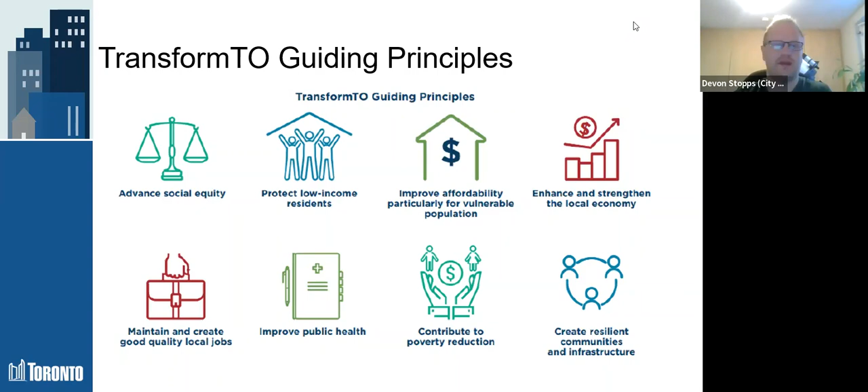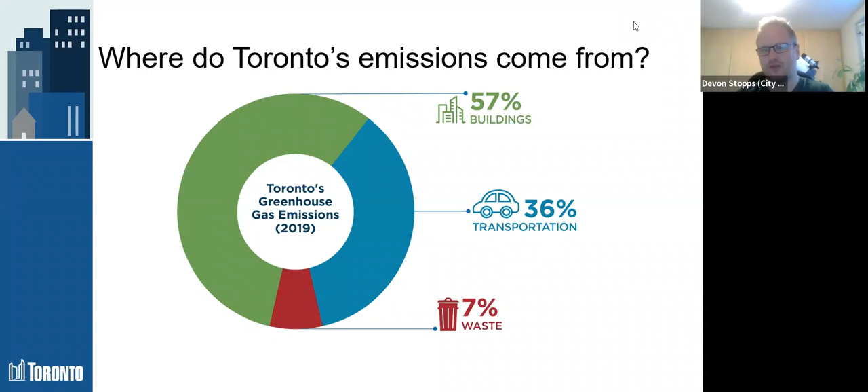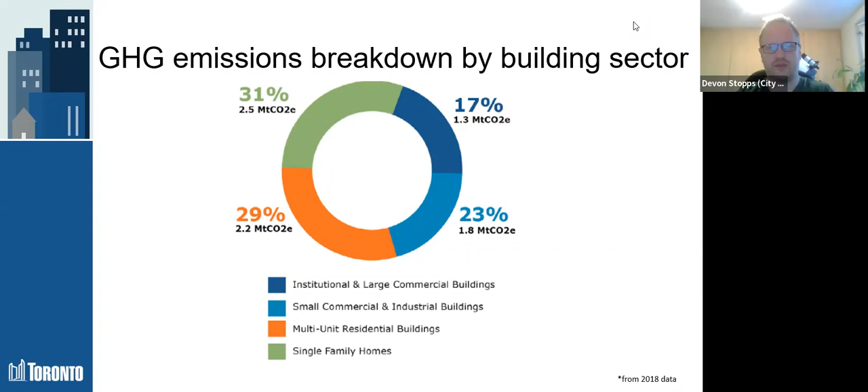So where did Toronto's emissions come from? In our latest greenhouse gas emissions inventory, we see that buildings actually make up 57% of Toronto's emissions, with the remainder from transportation and waste. Out of buildings, it's even more interesting to break down where this comes from in those sectors. I always like to use this slide to point to single family homes at 31% and multi-unit residential buildings at 29%. This is something everybody who lives in the city can touch, because over half of those emissions are from buildings that we live in.

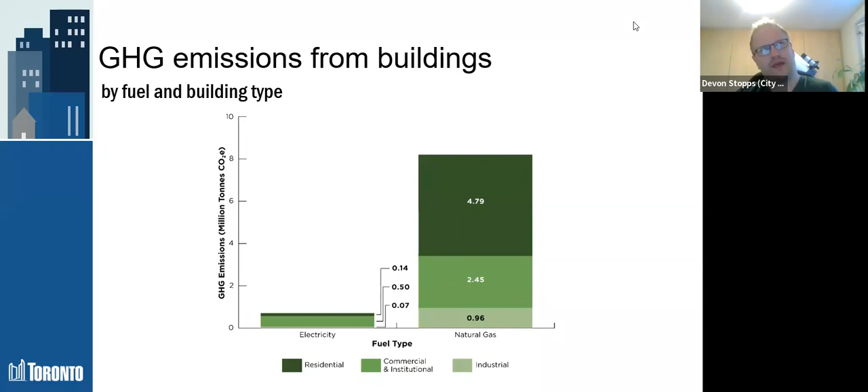And inside of those buildings, it's broken down even further by fuel type. Most of those emissions, as you can see on the right, are from burning natural gas, and that's almost always in residential and commercial buildings focused on space heating and water heating. We have cold winters, and we like to take hot showers. So that's something where there's an opportunity to do better.

So I'll hand it over to David to talk about new buildings before coming back to existing buildings after.

Thanks, Devon. Just to note, there was a question that popped up in the chat about what something stood for. I don't know if you saw it. I see that now. So MTCO2E is megatons of CO2 equivalent. We can dig into that deeper if you want, but just let me know. Send another question if you want to go deeper.

Oh yes, please. Okay, so CO2 is what we'd call one of the greenhouse gases, right? CO2 helps hold heat in the atmosphere. Now when you're looking at gases in the atmosphere, it's not just CO2 that helps hold heat in and causes this greenhouse effect. The other big one that's talked about currently is methane, and some of those fugitive methane emissions, because methane actually has a much higher global warming potential than CO2. So it's equivalent to much more than one unit of CO2. Same as other things like refrigerants in your air conditioner - they also have a global warming potential, and they'd have an equivalent value of CO2. So really, we just use this measure to make sure you're measuring in the same way across the board.

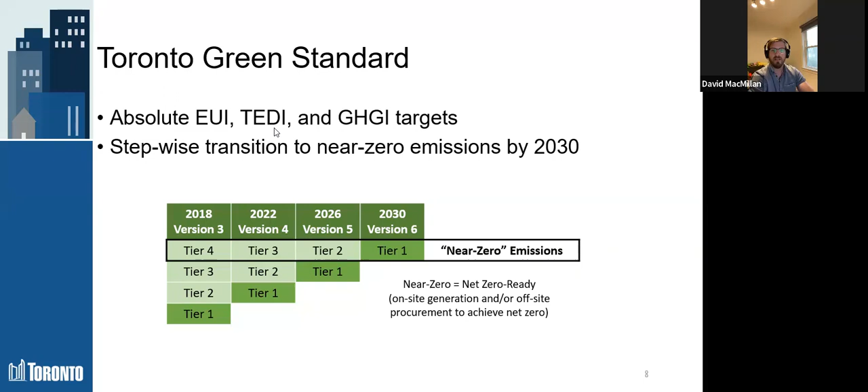But then it was accelerated just at the end of last year, as I said, when council adopted the net zero strategy. So basically our GHGI targets now in 2025, so it's been accelerated by 1 year for the next version of the TGS, version 5. And then the final version of the TGS, which is essentially net zero emissions, is now 2 years earlier. So in 2028, as I said. So we really have less than 6 years to get to buildings that are fully electrified and use some renewable energy on site.

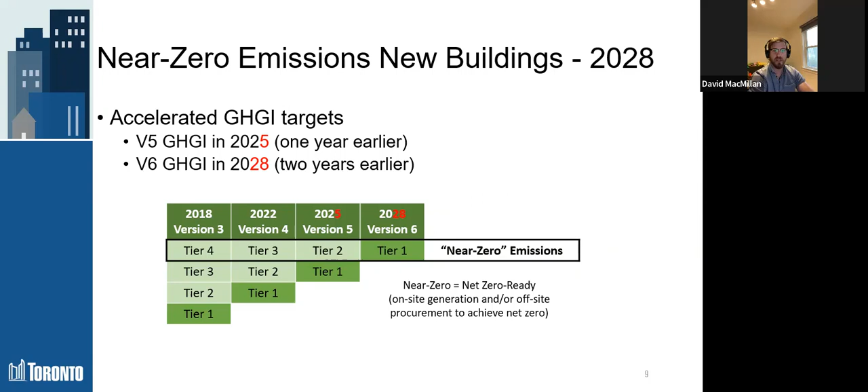Next slide. And it gets even harder for city buildings, which is what we're really talking about today, city-owned facilities like the St. Lawrence Centre. Since basically the start of this year, council said city buildings have to be net zero now. And it's important, and I can appreciate there's some nuance with these terms, but net zero is different from near zero. So city facilities have to actually achieve a GHGI of 0.

So if you're a private sector developer and you're aiming for the highest tier of the TGS, technically you have to achieve a GHGI of 5 kilograms of CO2 per square meter. If you're a city building, you have to get to zero. And that essentially means, as I said, 100% electric, no natural gas combustion on site, and maximizing renewable energy. Of course, built form really matters when we talk about how much renewable energy you can get on site. So again, there may have to be some discussion about offsite generation or procurement of credits of some sort.

And we won't go into those details yet, but something for you to think about over the next few days in terms of what this means for the St. Lawrence Centre. You do have to look at version 4 of the TGS, which is what we're in now, tier 3, that's the highest tier, plus some on-site generation if possible. Again, once you get into the design exercise, where could you put rooftop PV, for example, and how much of it? Is that enough to get you to an actual GHGI of 0? If not, what are the other solutions you use? For example, offsets, offsite generation, that's really up to you guys to figure out, but that's sort of the framework that guides performance for city buildings like this one.

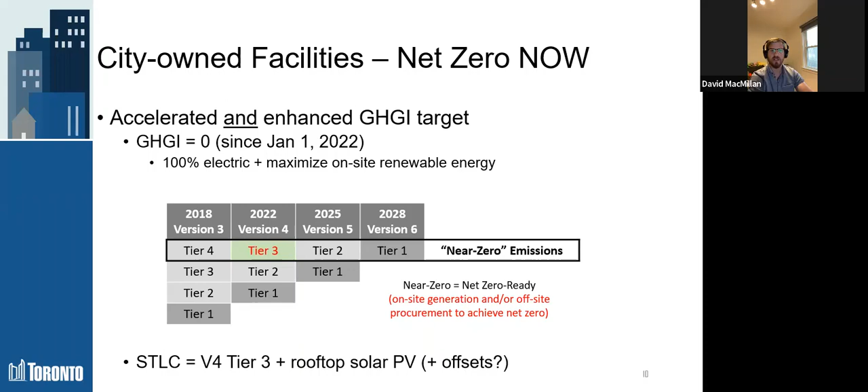So the next couple slides really are just some of the detail of what's required for city facilities in terms of what you actually have to achieve. So I did mention a GHGI of 0, but there are some other criteria. There are options essentially. Now, I think it's important you understand these. And obviously the choice to pursue one or the other really depends on the project.

So I would say focus on the GHGI of 0, but keep in mind that there are some other requirements in terms of energy performance. And the path you choose may depend on the use of the building. The St. Lawrence Center is a unique archetype. We don't have specific energy use intensity or thermal energy demand intensity targets for this type of building. And so that's something that, when you work with the experts joining the bootcamp, they will be able to advise on.

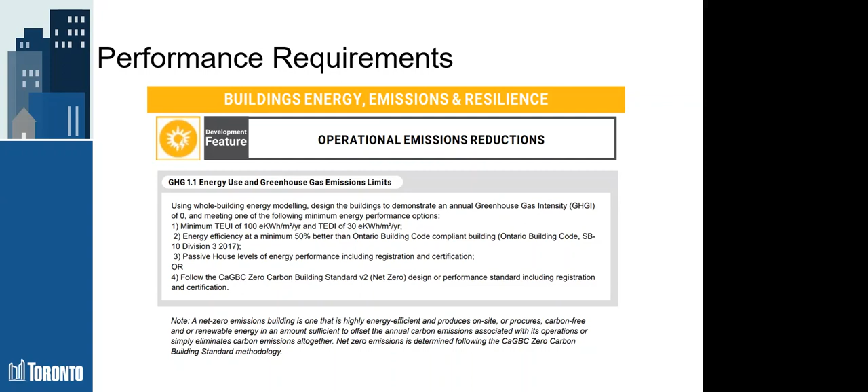So I think it's important to understand that even though we have these paths, the city is flexible in terms of actual energy performance, but where we're strict with requirements is on carbon. So that GHGI of 0 is really important. But by all means, go through these during the bootcamp, listen to the experts, and think about what approach makes sense for a building like this.

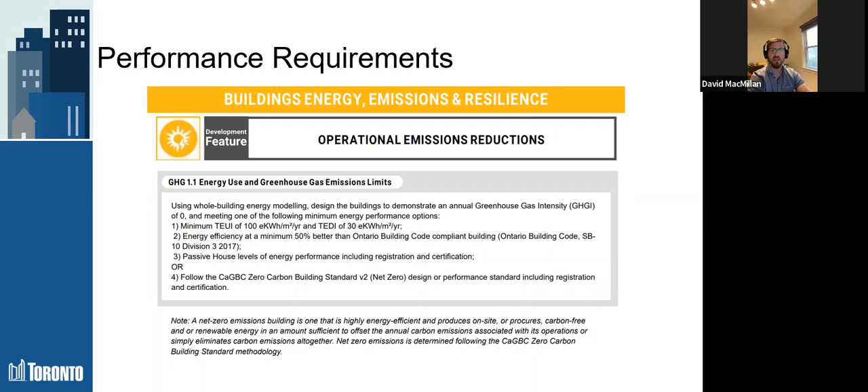Next slide. So resilience is also an important part of city facilities. I'll get into it a little bit more later, but essentially, when it comes to new buildings, our narrow definition of resilience is to have backup power. Obviously our grid is pretty reliable in Toronto, but there are situations where there are area-wide outages. And the question is, what role can buildings play in supporting people who are dealing with a power outage? Can they stay in their building? Is there a community hub nearby that they can visit as a place of respite?

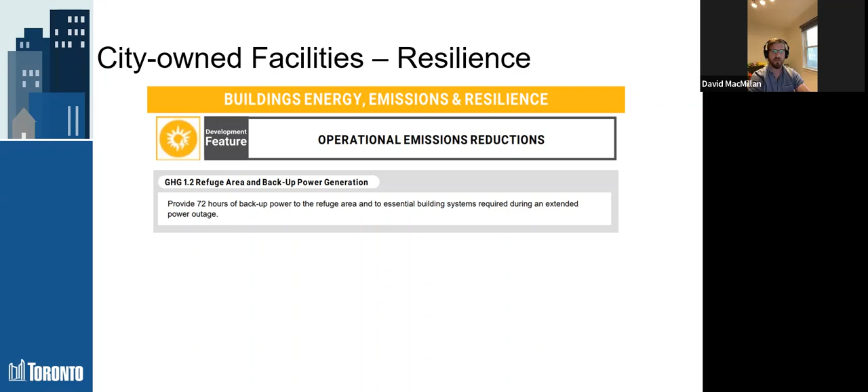Obviously, it's not written here, but I think it's implicit that a really high-performing building, particularly the envelope, helps with resilience because it loses heat more slowly than one with a poor envelope. But at the same time, there are certain things that only electricity can provide in terms of convenience. And so this is something that we take into consideration with the Toronto Green Standard as well. Next slide.

And then this is really a new one, and I think you'll get into this as well in the bootcamp, but embodied carbon. So everything I've talked about so far is operational carbon or operational emissions. That's essentially the emissions from the use of the building day to day, burning gas and consuming electricity. That generates direct emissions. But embodied emissions, there's a few different names for it. You might hear upfront emissions or material emissions, but essentially it's the carbon associated with construction, and even earlier than that, the manufacturing of the materials that you then use to construct a building. And really, it's actually about the whole life cycle of those materials. So it's a topic unto itself.

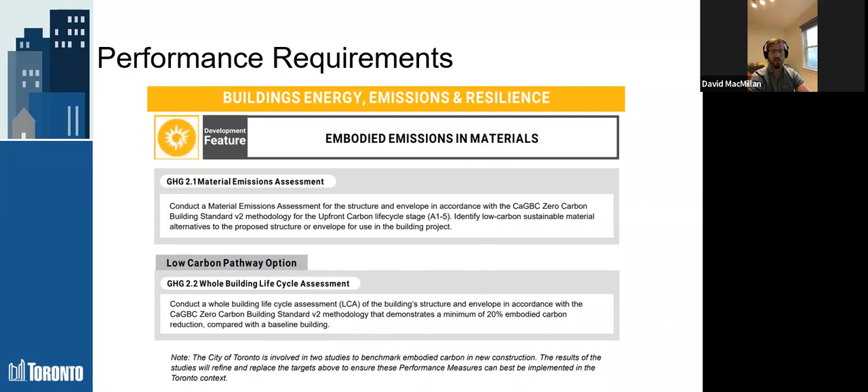So I think what's important for you to understand is that what you use to construct the building and the design of it has carbon implications. They are early in the project, they are upfront, and they can be quite significant, especially in a high-performing building, because you're not burning any gas, you're using very little electricity, you're using it efficiently, you're offsetting that with renewables. But those materials, whichever ones you choose and how much of them, there's a carbon content associated with them. There are ways to reduce that, and again, that's something I think the experts in your group will be able to help advise on, and I'll go through a couple of examples later. Next slide.

So now I'm going to talk a little bit about some of what we see for this building, and some of the things that we think you'll grapple with over the next few days. So the first one I'll go into next is embodied carbon. And before going to the next slide, just to point out, this is an existing building, right? All of that carbon, those CO2 emissions are already in the atmosphere, and I would suspect there's quite a bit of them.

So when you look at the existing St. Lawrence Center, it's a lot of concrete. It's a brutalist building from the 60s. This was a style at the time, and there's a lot of concrete in this building. And so I think it's important to be conscious of embodied carbon, considering we're talking about a redevelopment of this site. The heating and cooling source is also really important. Again, that's where a lot of the emissions come from, as Devin pointed out at the beginning. And then, of course, there's a few other issues that are equally important that we'll get into as well. Next slide.

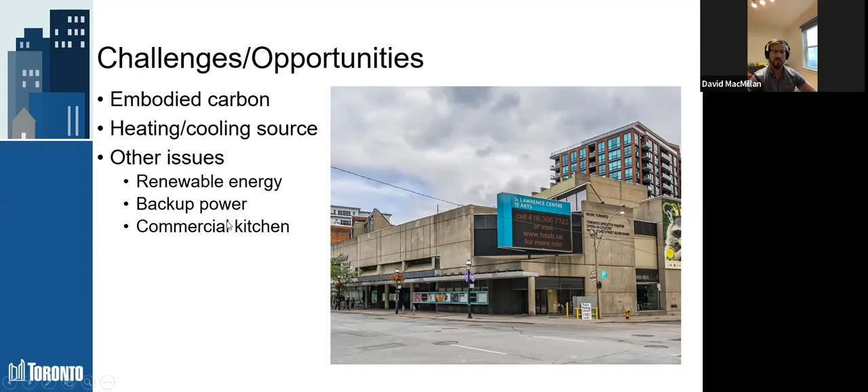So embodied carbon. As I said, we're demolishing a building in large part. And so I think it's really important you're aware of, first of all, how do we minimize the embodied carbon of the new building? And there are strategies to do that. But then how can you, if at all possible, reduce the carbon deficit? You may not find this written down anywhere, but if you think about it, we've started at a deficit because all of those emissions are already in the atmosphere. And so to truly get to net zero emissions, be zero carbon, I think it's important to consider the whole life cycle of a building and that we're not making the problem worse and ideally trying to make it better.

And so some of what that means is, first of all, avoiding carbon intensive materials from the get-go. So let's not make the problem worse. I've just listed a few here that we see as common culprits in new buildings. You want to minimize the use of concrete and steel. XPS spray foam, that's extruded polystyrene spray foam. It's a very common product. It's very good at what it's meant to do in terms of insulation and airtightness. But some of the expansion materials that are used in the product are very high global warming potential. And then aluminum is another very common product, particularly in cladding and window frames. Generally speaking, very high carbon associated with its manufacture, I should say.

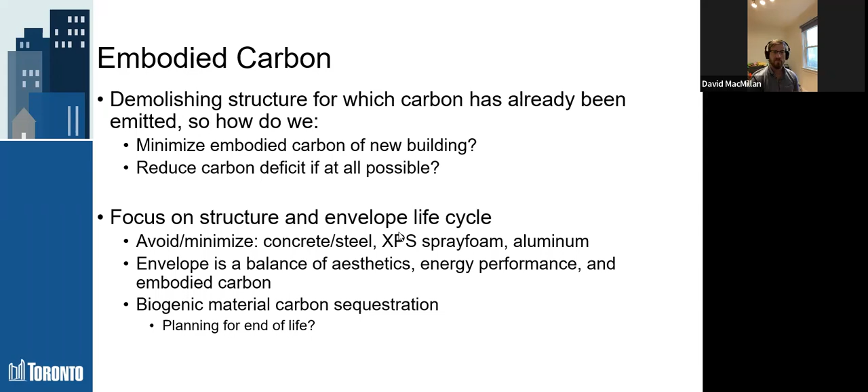So a little bit more on embodied carbon. I put in timber here, and there's actually a really good precedent in Ottawa: the National Arts Centre, a Diamond Schmitt project. They call it a rejuvenation. It's really a deep retrofit and modernization of an older performing arts building, and a lot of the structure and new material was timber. So there is a precedent for mass timber use in performing arts facilities. Mass timber, by the way, is just engineered heavy timber. Cross-laminated timber and glulam are some of the common materials that will be used. The bottom line is it's made out of wood, which is a biogenic material.

And so there are benefits to it in terms of embodied carbon compared to concrete and steel. But this is a performing arts facility. So I think as you talk to the experts, I'm not one of them in this field, but acoustics, sound transmission, those kind of things are going to be really important. They're important in a residential building when you're using wood, just because it's more conductive than concrete to sound. So something you're going to have to pay particular attention to.

Glazing, as I mentioned, the envelope is an important one. So with glazing, sometimes less is more. Hint, hint. So what is an appropriate window-to-wall ratio for a performing arts center? Obviously, it's a cultural and civic hub. I mean, it's one of those things that you want people to notice when they walk by. You want it to be transparent. So you want glazing, of course.

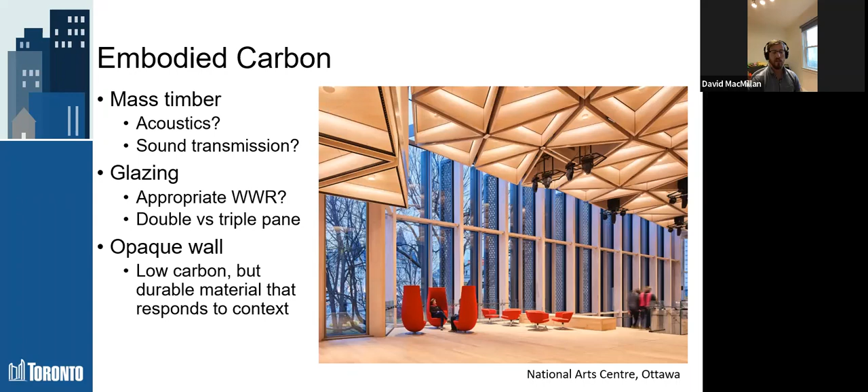So heating and cooling, and this is an important slide because really we're talking about electrification, but all that means is that what's doing the work to provide the heating is a heat pump. So it's a heat pump powered by electricity, right? The question is, in terms of the heating and cooling source, there are several options. And so I'll just go through them quickly, and this is very high level, but again, you'll have the experts over the next few days to talk about what's most appropriate for the St. Lawrence Center.

Air source heat pumps, very common technology, generally a lower capital cost, but higher operating costs, because of course, air doesn't have as much energy in a cold climate like ours during the heating season. So you can use a bit more electricity, so the cost can be a bit higher to operate them. And something to consider if you're thinking about air source heat pumps is you need somewhere to locate the condenser units, and that's typically on a rooftop. And I don't know what the plan is exactly here, but if you want something else for that rooftop space, you have to find a way to balance that.

Geo exchange or ground source heat pumps. That's using the earth as essentially a battery. It's warmer than the air all year round, so it has lower operating costs, but you have to drill bore fields, essentially, to get that heating and to use it for cooling. So it's all below grade, which is great, but again, the capital costs are a bit higher.

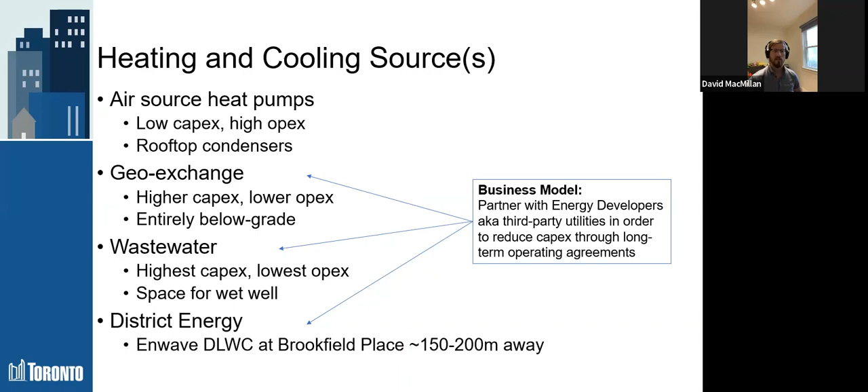Just as luck would have it, you're surrounded by very large trunk sewers. With any sort of infrastructure project, you want to minimize distance between source and sink, and here it's running by your doorstep on Front Street, and it happens to be a very large trunk sewer as well. I think there's close to 9 megawatts of heat there. This is a lot of heat, probably more than enough for this building on its own, and for other buildings in the area as well. So the bottom line is, I think it's worth considering this as a potential low carbon heat source.

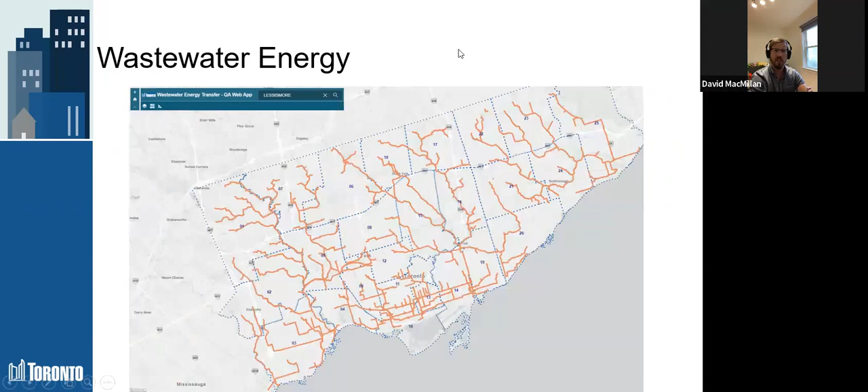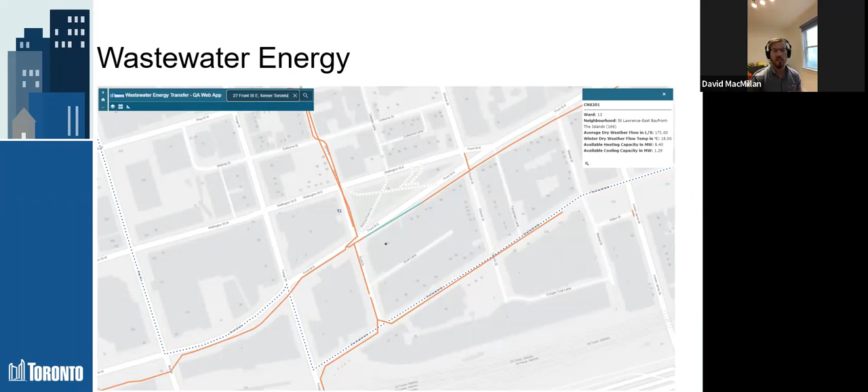I think on the previous slide, the blue are just the ward boundaries or maybe the neighborhood boundaries. Yeah, I think it's the one on Front Street there, right? There's a blue section. That's just, when you click on the section of trunk sewer, it pulls up that section there. So basically it tells you, if I were to click on a different section, that section would then turn blue. It's only pulling up the stats in terms of flow and temperature for that section you click on. That's why it's highlighted blue. It doesn't mean anything else.

I'll just quickly go through a few other things to consider as you work on the St. Lawrence Center project. I mentioned rooftop solar photovoltaics at the beginning. We see that a lot in Toronto as a way to offset some of the electricity you use from the grid. But we're downtown here, right? So the question is, what about shading? What about the green roof? There's obviously a plan for a green roof here, and they can coexist, but it has to be done with careful planning.

The commercial kitchen, and maybe Devon, I don't want to put you on the spot, I don't know if that's something you want to talk about. We recently toured a new passive house student residence at University of Toronto Scarborough with a fully electric commercial kitchen, which is very uncommon. But if this building has a commercial kitchen, that's going to be a really important thing to think about to actually achieve the zero carbon goal. Devon, do you want to add anything on that? Yeah, I mean, I'd point to some resources.

So I believe there's a great paper out of Sweden from 15 years ago where they looked at the energy use in an all-electric kitchen versus not. I think we're lagging a little behind, but the possibility to run an all-electric commercial kitchen is definitely there, especially looking at technologies like induction stoves that are much more efficient, and pretty much every device.

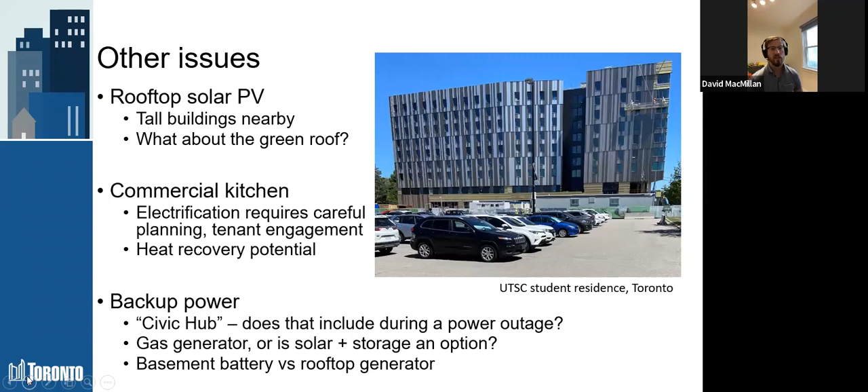Next slide, Devon, and I think this is my last one. My colleague normally from environmental planning would be here to talk about this. They couldn't make it, so I'll just quickly tell you about it. I won't be able to answer a lot of questions on it, but I think it's important for your knowledge that there are other requirements in the TGS that have nothing to do with energy—or rather, aren't specific to energy and carbon. There are a couple of areas where they overlap, but these are just at a high level. If you click on the reasons at the end, you can go into their detail, but this is just a high-level look at some of the other non-energy and carbon elements.

I don't know that there'll be any parking here. If there is, we have EV readiness requirements. So that's something for you to consider as you think about serving this site electrically.

Managing water is a big part of the green standard. I highlighted stormwater management because the green roof is going to be, I think, an important way to do that on this site. There's not a lot of open space, and so if we go with something like solar or otherwise hard surface, you lose some of that ability. So these are just some of the challenges and trade-offs that you need to think about as you go forward.

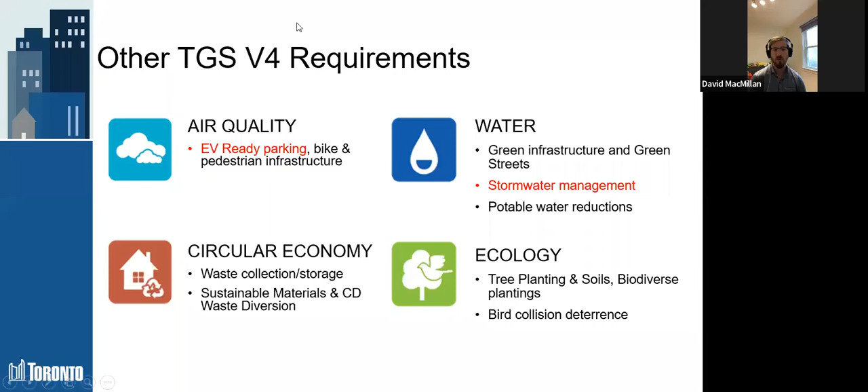Next slide, Devon, and I think it's back to you. All right, great, thanks so much, David. So I wanted to start talking about existing buildings. My group helps existing buildings with guidance on how to get towards net zero or how to build a better project. We also work on financing for some of those projects to enable those, and we're rolling out a few other programs as well.

I wasn't going to focus on this slide too much, but these are some of the programs we run for existing buildings out of the city. One of the key things is our emissions strategy for existing buildings. We put this strategy together to hit a 2050 target, and we're currently updating it to hit the 2040 target. But the actions out of this remain the same, more or less, just faster.

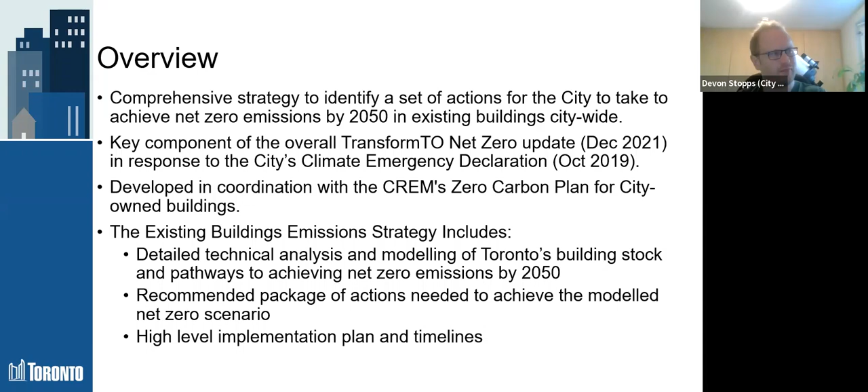So I'm going to touch on a little bit today the technical analysis and modeling that went into this, the recommended actions that came out of it, and the high-level idea of how to implement, which hopefully will help contribute to your project. So we were looking at...

balancing those. How do you retrofit the entire building stock in Toronto and balance greenhouse gas emissions reductions with the costs of retrofitting all of the buildings in Toronto?

And so I think a big part of that we'll get into further is the co-benefits. So you save energy in doing these retrofits, but you also, as David pointed out as well, improve the resilience, the ability to ride through a power outage. You improve the health of everybody from lowered emissions. You improve occupant comfort, in terms of better thermal or less noise. And this can be used to drive equitable solutions and lots of green jobs in the city as well.

So key findings for existing buildings. It is possible with our current technology to retrofit to 80% plus emissions reductions across all buildings in Toronto. So getting all the way to net zero is not technically or financially feasible just doing building retrofits. You need to be able to offset that remaining fossil embodied carbon or operational carbon, or have some other measures.

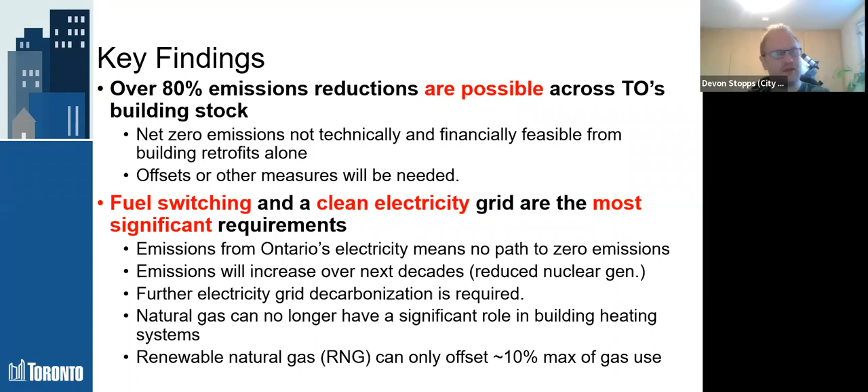Can't be done. Very similarly with hydrogen, you have to remember that clean hydrogen, green hydrogen, is produced from electricity, electrolyzing water, and gray or blue hydrogen is produced from natural gas. So you still have a carbon component of that, it's not a be all and end all solution.

So back to buildings. Key findings out of this: we need to upgrade the envelopes of buildings. That's the insulation, the windows, the air sealing, the doors. This needs to be done to help keep the peak demands lower, so on that coldest day you want to be able to keep your heating load lower. This helps save system costs on the electricity system, which is a huge component as well, avoiding building more generation that way.

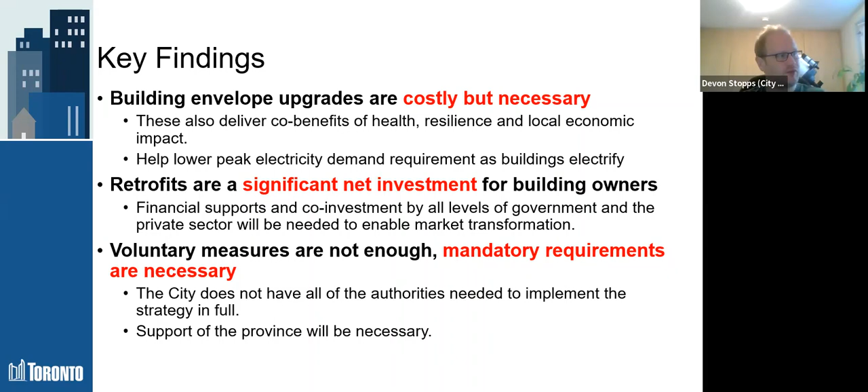So building retrofits are a significant net investment for building owners. There is not a payback to going net zero. And so the city also is looking at how do we make these measures mandatory. We need to require, similar to TGS that David was talking about, requirements for existing buildings when they retrofit.

So the actual results from the strategy: we figure we can reduce sector-wide emissions by 82% across the city. This is all private buildings and publicly owned buildings, all buildings in Toronto.

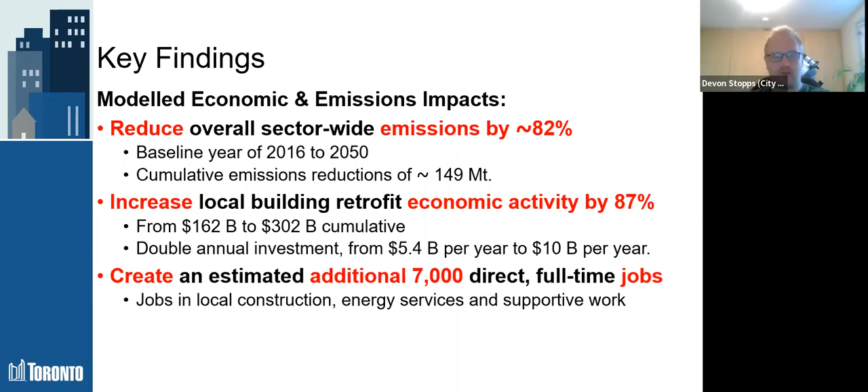And this is a huge economic stimulus for the city as well. You're basically doubling the amount of retrofit that is done over this period of time, increasing from 162 billion that would have been spent on building retrofits in the next 30 years to 300 billion. So that's the opportunity to create a lot of new green workforce and supply chain, and that's a great way to drive some more growth in Toronto.

So the co-benefits, here's just a few examples.

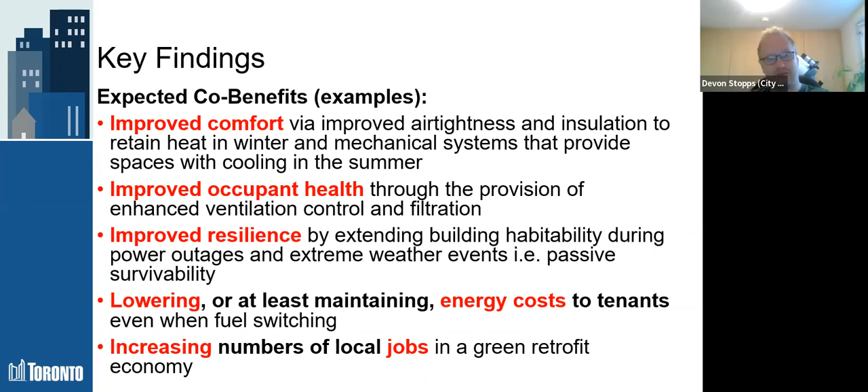Improved comfort is a huge part of this, improved occupant health, improved resilience. And there's the potential to lower energy costs. Right now in August, the cost of natural gas has gone up about 30%, so that will translate to higher heating bills this winter. And electric heat through heat pumps starts to have a significant advantage.

So out of this strategy, what are we looking to do with existing buildings? We're looking to set requirements and assess current building performance. We want to get data from buildings: how do they operate now, how much energy do they use? Out of this, we'll be establishing requirements, similar to the TGS requirements David was talking about.

We'll have requirements for existing buildings. There are other jurisdictions that do this now. It's a pretty cutting edge thing, I'd say, which will be very interesting to see how some of this shapes up.

Then we're also looking to provide integrated retrofit support to enable this. So like this process you're going through with the St. Lawrence Center, we need to be able to convene those experts and say, how do you get there? What technologies do you use? How do you deal with building specific problems?

The people in charge of most buildings, either building owners or operators, don't always have the background to know how they should retrofit. So we need that roadmap for how you get to where you want to go.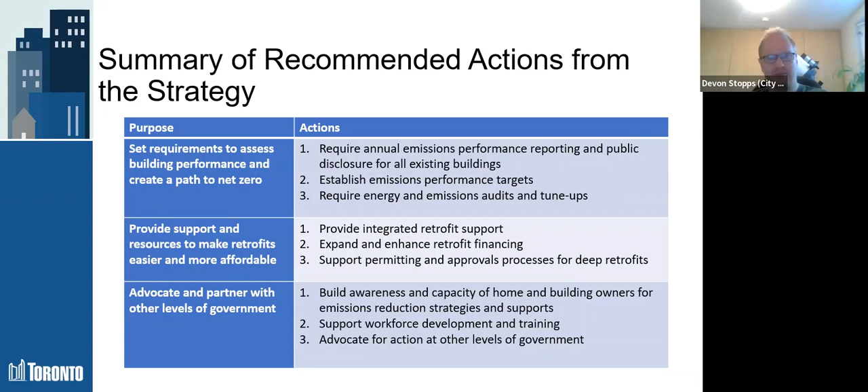The city's also going to build awareness of how to decarbonize and what net zero means, expand supply chain and workforce, and advocate to other levels of government for action. We're planning to transition, probably from voluntary first to mandatory over time, and we're scaling up our programs — our retrofit supports and our loan programs.

It's a very exciting time to be in this space. I'm going to touch on this — I've reused these slides. One of the initiatives we're in the process of launching, which will go live in the next few days, is a deep retrofit challenge to drive more development of deep retrofit projects.

I'm highlighting this because of the second line here — when talking about deep energy retrofits, we're talking about a significant energy reduction. That's something really important to keep in mind. You'll hear from other experts as well, but that significant energy reduction in the building is very critical in order to make these projects economic.

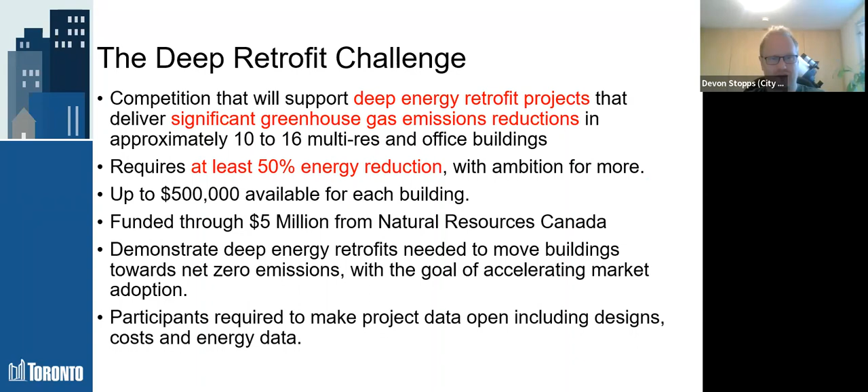So improving the envelope is part of a deep retrofit. When you talk about deep retrofits, you're talking about all of the building systems, how they interact, and how you use energy from one place to preheat another — like waste heat to preheat cold water coming into your water heating system, or how your ventilation system interacts to remove waste heat from kitchen exhaust to preheat cold winter air coming in.

So key things, again, I'll always come back and reiterate these points: the building envelope — the insulation, the windows, the doors, how airtight it is — is critical to managing that peak load.

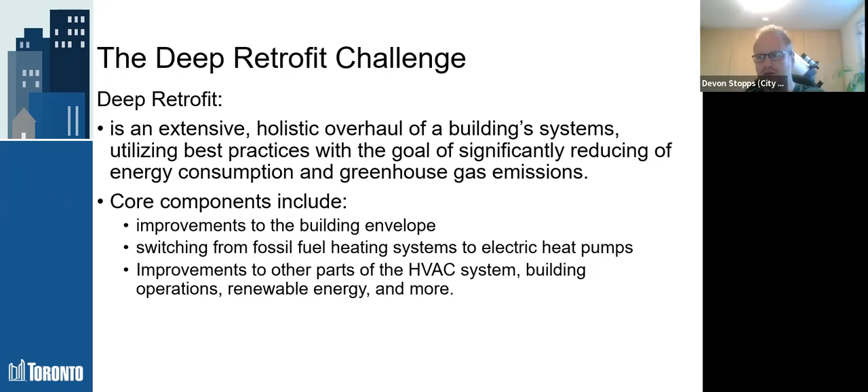A critical part is fuel switching off fossil fuel natural gas to electric heat pumps, be it ground source, air source, wastewater source, could be anything, but that switch to electricity is critical, right? And then you have to consider all of the other aspects of the building, how they interact, from operations and occupants to building controls that decide when something's turned on or when to turn it off, and then finally integrating renewable energy to offset that last bit of carbon-intense energy used.

Right, here's the examples. I talked about these already. I should have been on the next slide, I guess.

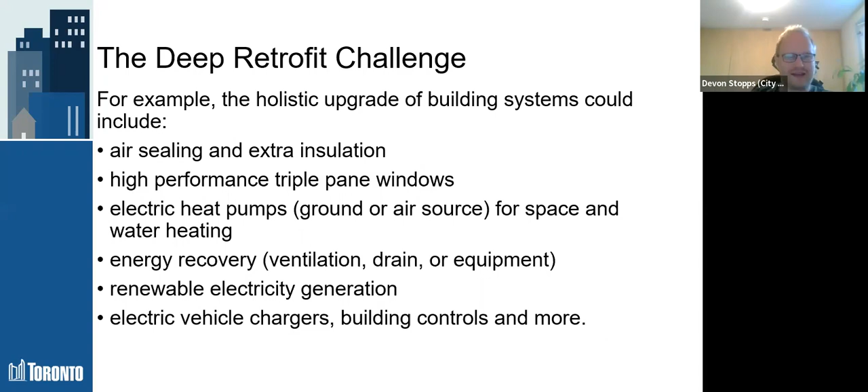And this is another critical part that I just thought I'd mention as well before we get to wrapping up. So efficiency. When you think about a gas furnace, it might be rated for 96% efficiency. Because of turning on and off, heating up, it's going to be a little bit lower. So you think in that 80% range, okay, that's not too bad efficiency. You think about now an electric resistance heater, like a baseboard heater. Anytime you have electric resistance, it's basically 100% efficient. So, doing well in terms of efficiency, although electricity typically has cost more, so it's still more costly to run.

Now, when you get into heat pumps, you're looking at something that's at least 300% efficient. So you're getting to use a lot less energy heating with a 300% heat pump than an 86% efficient gas furnace, right? So that can help bridge the cost barrier between those systems. Looking at something like ground source that David mentioned, it can be even more efficient than air source, just because of that energy in the ground. The higher temperature through the winter can help it be more efficient, right?

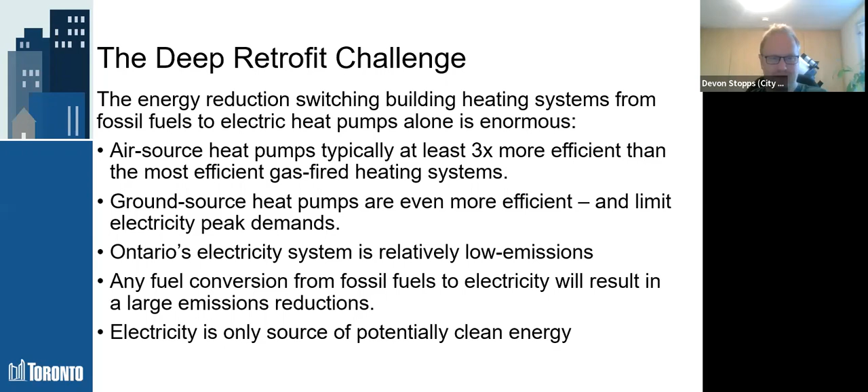So I'm not going to talk about this one too much. Again, just a reminder that there's no simple payback on doing these projects. So, I think you're going to struggle with the economics of these projects, but that doesn't mean that there isn't a future case for something like this. I think, in a time of increasing carbon pricing, that can really help enable these projects. Increasing cost of fossil fuels, we're seeing it with natural gas and with gasoline, that costs have increased recently significantly. And something like that can help shift the balance to make heating with electricity more cost effective, right?

So to actually get where we need to go, basically most buildings, except for some of the newest buildings, all buildings in Toronto are going to need windows, insulation, air sealing. Even those newest buildings that David was talking about, those buildings that are being built to the highest tiers of TGS today, are still often installing some sort of fossil fuel heating equipment. That's going to need to go. So the version of TGS that comes in 2028 basically requires that to go. But up until that point, all of those buildings are going to have to replace the systems they installed with something with electric heat pumps again.

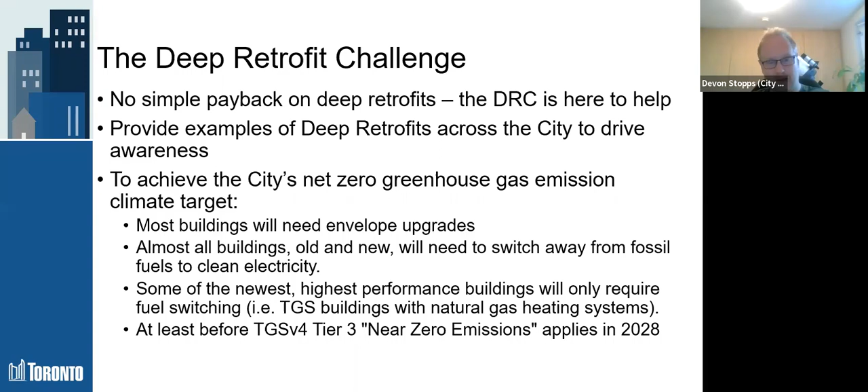And yeah, this is reiterating a bit of the same thing again, where I just love saying this. We need to move from the fossil fuels to electric heat pumps. You know, and it's possible then to meet our net zero targets. Very ambitious to do it by 2040, but with action now, there is hope to get a large portion of the way there.